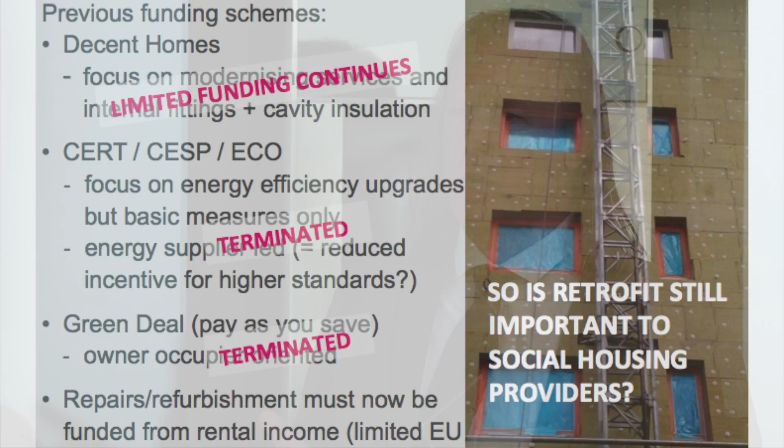Never mind. So yeah, we also talked about previously that the assumption was that in the UK we have all this funding for retrofit, but actually we don't so much anymore. True, in around about 2000 we used to get a lot of funding under a scheme called Decent Homes, but that was largely geared towards a bit of cavity fill insulation, but also mainly towards modernising kitchens and bathrooms. That's still trickling along now, but doesn't really happen to the same level.

We used to have schemes called CERT, CESP, ECO: energy reduction targets, energy saving programs, energy company obligations. So they were focused on energy efficiency, but not what I would call really deep measures. This was like, how can we do all the easy stuff, but not really worry about all the difficult bits?

And the problem for me was that this was being funded by the energy companies. So you start to wonder, actually now I do realise why they don't want to do this properly, because it's in their interest to have customers after having carried it out. And they've done their job, their lobbying, very, very well, because now that whole programme is terminated. So we have no funding really anymore.

We tried something else called the Green Deal, which was a pay-as-you-save scheme. So the retrofit is paid for by the drop in energy bills, and the difference you then use to fund a loan that paid for the retrofit in the first place.

The problem there was that the interest rates set by the government were just putting people off, and it tended to be geared more towards owner-occupiers, but they just weren't willing to invest. It's cheaper at the moment to just take out another mortgage than it was to go through that. So the Green Deal has now been cancelled. So any refurbishment that is done now by councils or housing associations just has to be funded from the guaranteed future rental income.

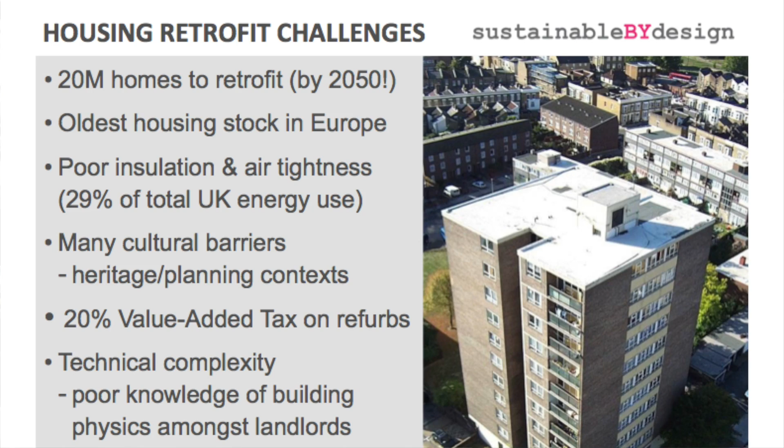And we have the same problems. We have all these heritage and planning constraints. That means a lot of buildings we're not allowed to alter the external appearance of them. We have disincentives like VAT, value-added tax, costs 20%, whereas for building new homes, there's no tax on that. So it's disincentivizing refurbishment.

And it's just really difficult doing retrofit, especially if you're trying to do it with people living in the buildings as you go. And a lot of our housing owners, they don't really understand building physics. They just want easy silver bullet solutions, but they don't really exist.

The other problem we have is leaseholders in buildings. We had a scheme whereby tenants of council housing were able to buy their property at a discounted rate. They now want to extend that to housing associations, and they're talking about $150,000 discounted rate off the market price for their flat or house. So a lot of people are going for that, but it's reducing the amount of stock.

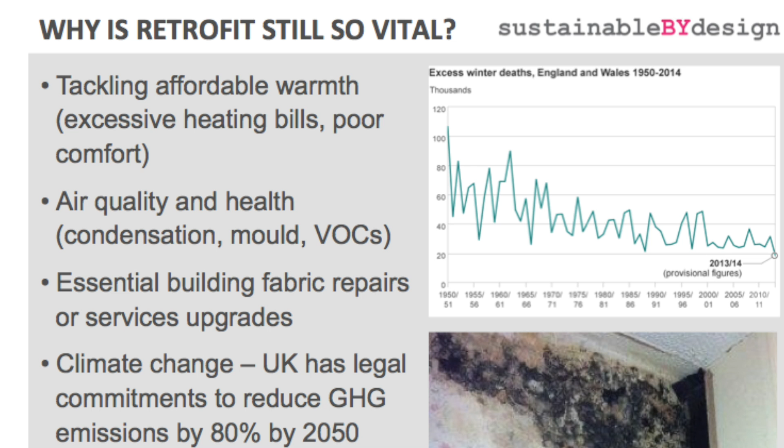It means you've got owner-occupiers in the same buildings as tenants, and they have very different wishes and hopes for retrofit. But we've got to do it. We've got a problem. We have a problem with affordable warmth. We still have around 25,000 excess winter deaths every year from cold. We have air quality problems. We have high levels of asthma.

We have all of these mold issues that have come about largely because all of these district heating systems have become obsolete and have been turned off. So we have individual heating systems in each flat, but to save money, people just don't use them. So then they get health problems. And as Bomi said, all of this is getting old. It all needs repairing. It all needs replacing.

And then finally, we have climate change. Like New York, we have a UK commitment, 80% reduction by 2050. And climate, I don't have to tell you about climate change because I asked the Pope to have a few words about that last week. So I think we've covered that one.

And she said that actually, if we're going to do retrofit, we should be doing retrofit, but it's a problem if we do it half-heartedly. We've got to do it once, and we've got to do it well. Every building retrofitted in a suboptimal way locks us into a high climate footprint future because it costs that much more to do the extra bits that we need to get to.

So that's kind of where I start with clients, is saying, look, we need to do it, but we need to do it really well. It's not okay to do your little bit. You've got to do a lot. You've got to do that $150 one, not the $50 per square foot retrofit.

You call them row houses, we call them terrace housing. Well, I don't know, there are a lot of problems. They all have open fireplaces and chimneys, there's single glazed sash windows, sliding windows, solid brick walls. Planners will never allow us to overclad on the outside of those, quite rightly too. We don't want to destroy our cultural heritage at the same time. So I'm not sure this is the right place to start.

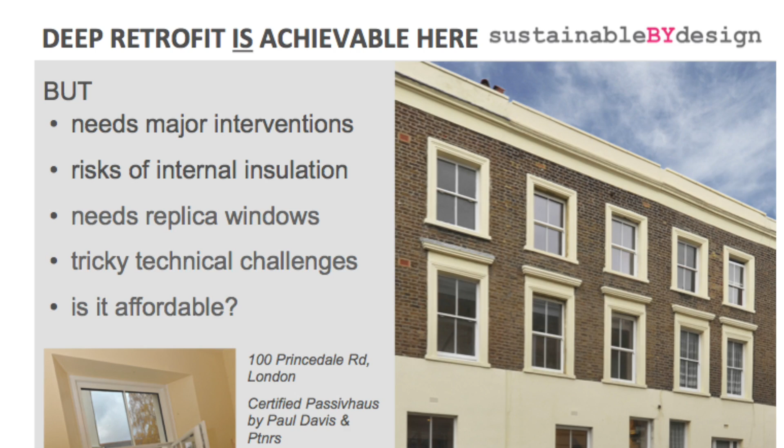I think you can do it. This has been done. One of those is a passive house, but you can't tell the difference. But is it affordable? Because you have to do special things like getting sash windows that are triple glazed, that open inwards and do all sorts of clever things. So it is possible, but it's probably right now not the best place to be spending the money.

I think we should be focusing more on this sort of stuff, which is similar to what you were seeing before. This is a Thamesmead Estate. This is where I've been urging people to start. And it's not just about retrofit. There's all these other things that you can do at the same time. You can deal with these fabric issues.

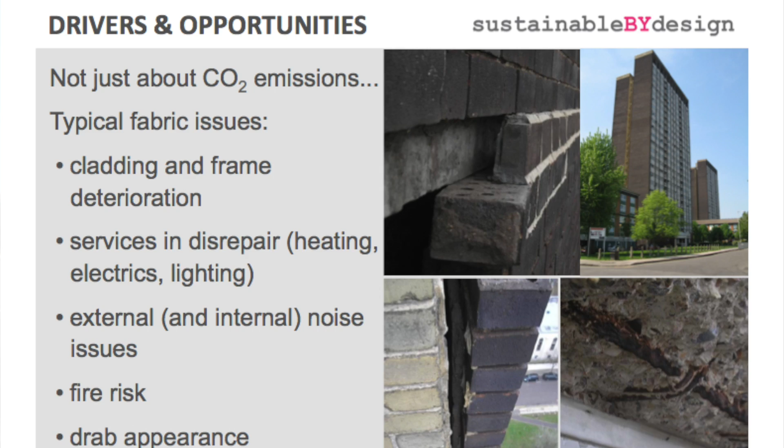Here's that brick facade peeling off the building on the 20th floor. A bit scary. So this is happening because these buildings are 50 years old. All the services need replacing. We have lots of problems with internal, external noise. They're all built next to dual carriageways, which are now really busy and very noisy. And everyone's complaining about the drab appearance of these buildings when they've had the nice, new, shiny, low-rise stuff. So we've got to do something about it.

Well, I thought this was high-rise. I can't call it high-rise anymore. It's only 24 stories or something. Can't call it high-rise anymore.

But lots of problems, lots of concrete, very poorly insulated, high bills. It's electric storage heating because the building can't take gas because of explosion reasons, progressive collapse reasons. It's owned by the city council, and they've got real problems and they're under a lot of pressure to do something about it. So their idea was, let's introduce a district-wide heating scheme that can do all of this block and all of this area. Well, we better do a bit of insulation if we're going to invest in all of that. And that's how they went forward.

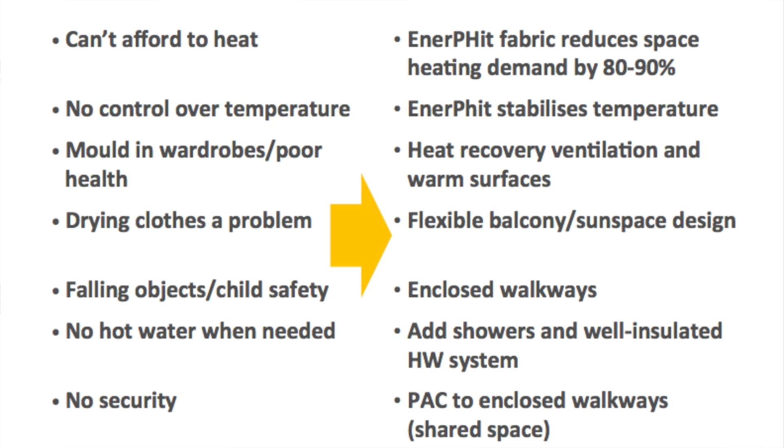So their problem was they can't afford to heat the space. Well, EnerPHit will reduce that demand by 80 to 90%. They can't control the temperature. Well, the cladding can stabilise the temperature. They have all these mould problems. Well, we put in heat recovery ventilation. And one by one, we dealt with all of the issues that they had and turned it around and started to get real support.

The overcladding strategies we had to deal with, they look simple. That looks like a big solid facade. We'll just pin insulation to the outside. Unfortunately, that's a bit of a cheat, because the outside face of that is a sandwich panel, unreinforced concrete, only 2 inches thick. And if we started pinning insulation into that as we would normally, it would just shatter. So what looked straightforward became more complicated.

These big blue things, they look very strong, but they were sized just to carry their own weight in these balconies, and even adding insulation to them would have been too much. They're also not actually joined to the inside building. They just kind of sit there on their own. So our new structure had to brace either side of that and go right through into the party wall structures to tie it all together.

But now the new steel structure holds everything together. And that's how we solved the outside for them. The cheapest way of doing overcladding in the UK is to put an insulation on the outside, pinned onto the wall, and then have a render finish over the outside. Now for me, that would have just recreated the same fairly bland facade.

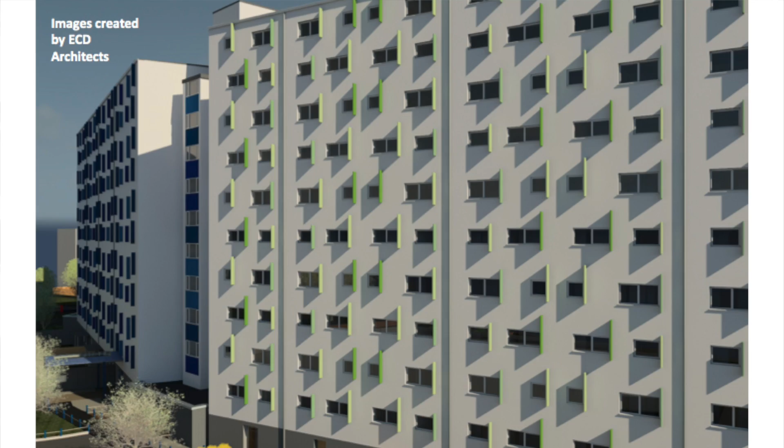So we talked to them about, one of these is quite west-facing. We talked about the need for shading. You can always approach these buildings from different angles. So actually we talked about how if we use these fins to help with shading, we keep them on the south side anyway, but it just means that as you start to approach this building, you see it obliquely, you see different depths of colour. As the sun moves around, you get different levels of shading. So you get quite an animated facade from quite a boring window grid.

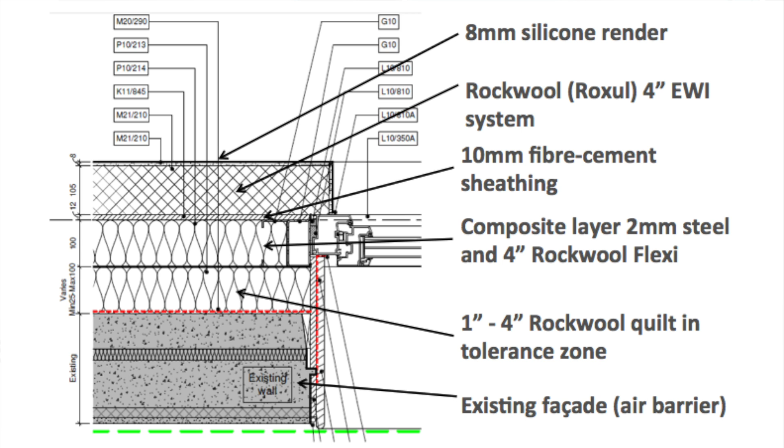And there's a kind of diagram of how we had to put steel on the outside, but we're putting a lot of insulation on the outside of here, a foot of insulation clad to the outside of this building, triple glazed, plastic framed windows. And that was our vision for the outside of that building. A bit more glazed here.

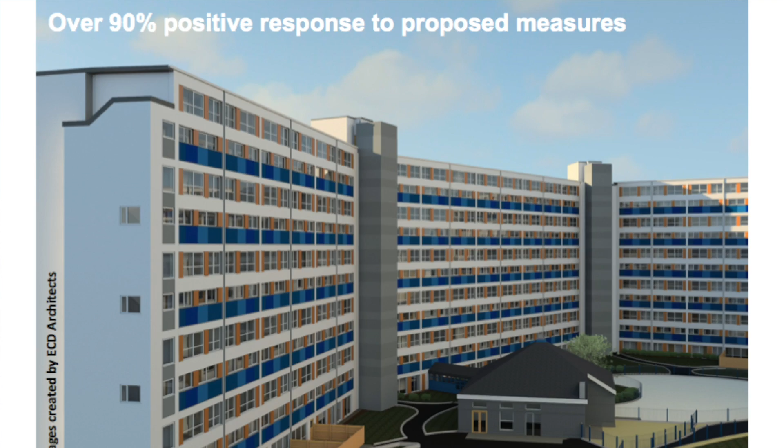We've got a lot of walkways, and for the balconies, we sold the idea of, well, we have an insulated enclosed balcony, but you can have windows that would open up, and you still have a secondary insulated envelope behind the balcony so that they can use that for drying. They can use it as a balcony, but in winter you can close that off and it's all part of the thermal envelope. And they all picked the blue colour.

That's the colours of the local Portsmouth City football team, soccer team, sorry. So yeah, I tried to choose the rival colours, but they wouldn't go for it.

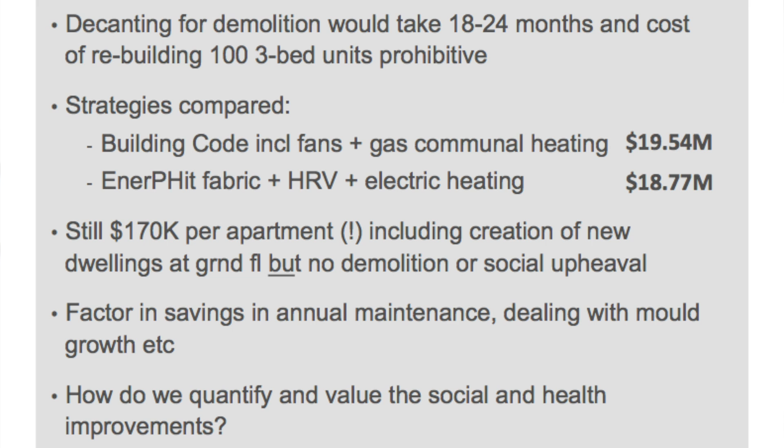So anyway, we had to make this argument. Is this all affordable? Well, the answer is it actually came out cheaper than their scheme. Not by much, but enough. But the benefit was that the tenants' bills would go down by that 80%. It's win-win. It doesn't cost more for the local authority, but the tenants gain massively from this. View of that kind of balcony area.

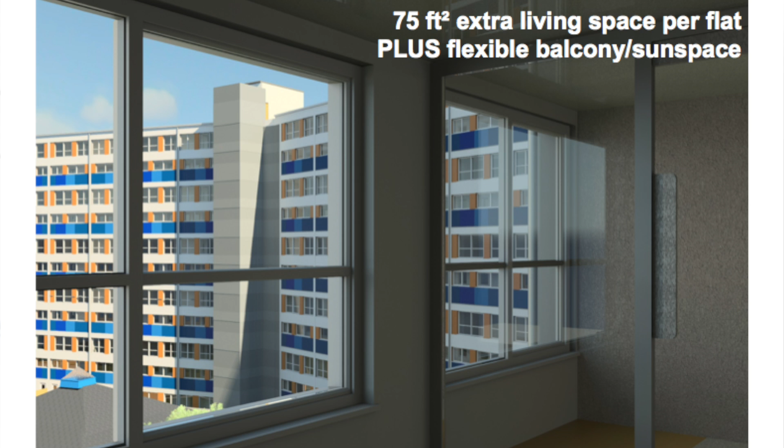So they had to then sell it to their board, to their government, and they took the view that the do nothing option didn't exist, it would become uninhabitable very soon. They were able to get very good rates on loans. They did the calculations. They found that the extra over to go to EnerPHit paid for itself within 15 years. Plus then they sold all these other benefits about the health, the affordability.

If you can afford to heat your house cheaply, then you're more likely to pay the rent. So they can save on rent arrears. Their operatives don't have to go in and scrub mould off twice a year. So there are lots of other benefits that we start to build into the picture.

So where are we now? I actually left that architects. I designed that. I thought that was the end of my involvement in it. I moved to a new practice. They appointed a contractor. The contractor said, we need an architect to see us through the delivery phase. So everyone said, oh, you should go and talk to Mark. So I've ended up working back on the same project again, which is good.

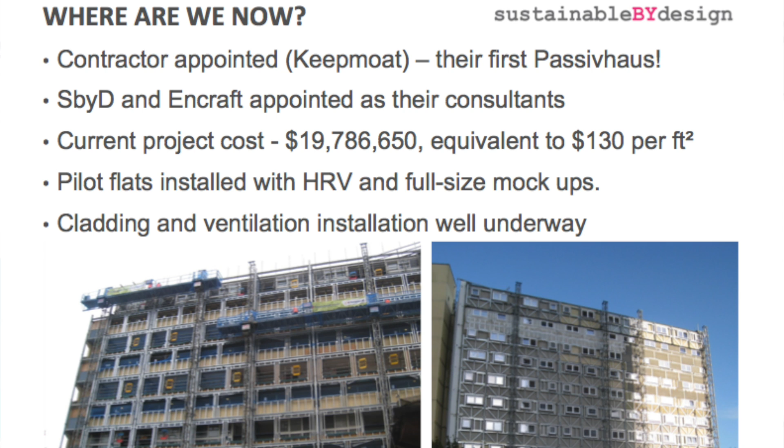The price has gone up a little bit as we've found more asbestos and we've got more involved in it, but it's around about $130 per square foot currently. But a lot of that's new. We're getting new flats. All of the ground floor is being converted into new flats, and every flat gets 75 square feet of extra space.

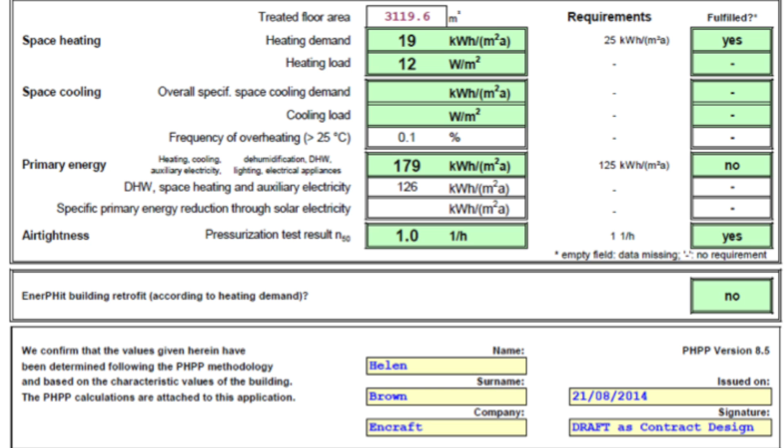So here we are at the moment. For anyone who understands PHPP, that's 19 kilowatt hours per metre squared. That's pretty low in terms of heat. Use British thermal units. No one in Britain uses British thermal units.

The other interesting one, overheating, 0.1%. So this has been designed for cross ventilation so that it doesn't overheat, so we don't need air conditioning. I was interested to hear about your peaks being in the summer. Air tightness. One of our problems is our energy use is still quite high because of that use of electricity. We have dirty electricity, so that's something we have to work on. But here we are now.

There's the exoskeleton going on. This insulation goes behind that, in between that. And on the outside, we've got a fibre cement board. So that's ready for its final layer of 4 or 5 inches of more insulation. Rockwool, you call it over here? Rockwool. So that's going on the outside. These are triple glazed Austrian windows, insulated frames, triple gasket, airtight, very high performance windows.

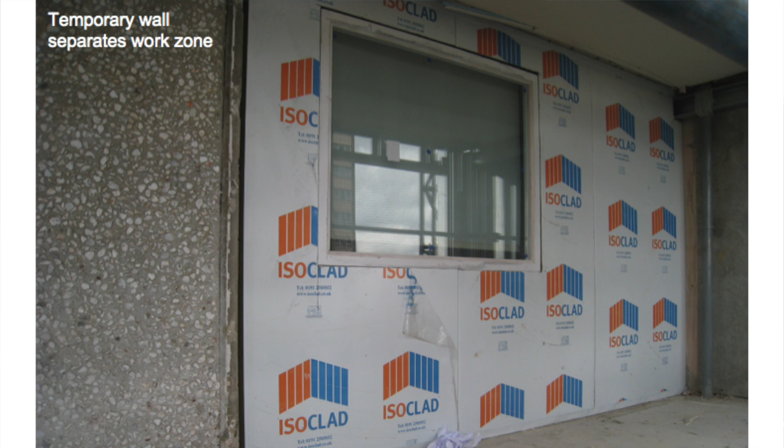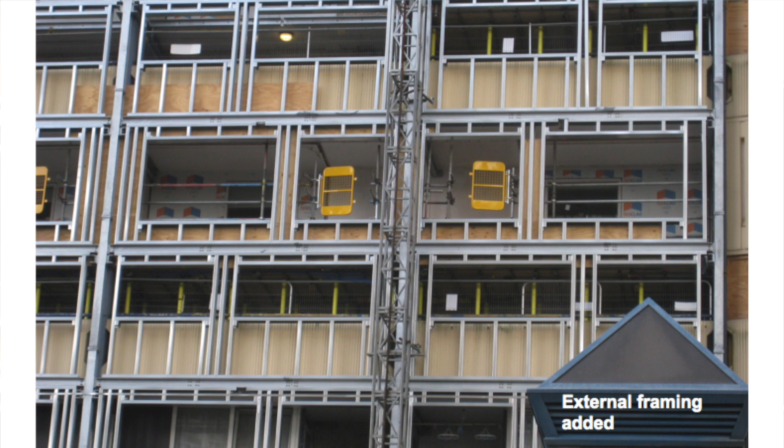Everyone's living in this building whilst we're doing it, by the way. So we had to create these enclosures. We reduced the size of their living room temporarily, do a load of works on the outside, crunching off all of these balconies, all done with the residents living in situ. We extend that living room, enclose in those open walkways, and there's the new facade window being created. That's kind of where we are now.

We have to fit in heat recovery ventilation, so we do that all in the ceilings, and there's a lot of semi-rigid ducting all going in, all at ceiling level. It's tight, but it just about fits. And that's the vision there, these are all produced by my former colleagues at ECD, of how that should be by the end of next summer.

I've got 2 minutes to talk about the other project. I'll have to skip loads of it, but I want to get to the pictures at the end. This is the building we're talking about, a bit lower, 5 stories, 4 stories sitting on top of a car park. Pretty hostile urban environment, not exactly a nice street. This is one of the main streets through this part of London. This is the other side, a bit nicer, facing the south. Everyone has an individual balcony, 2 stories of duplexes. Again, that car park. How can we make use of that space?

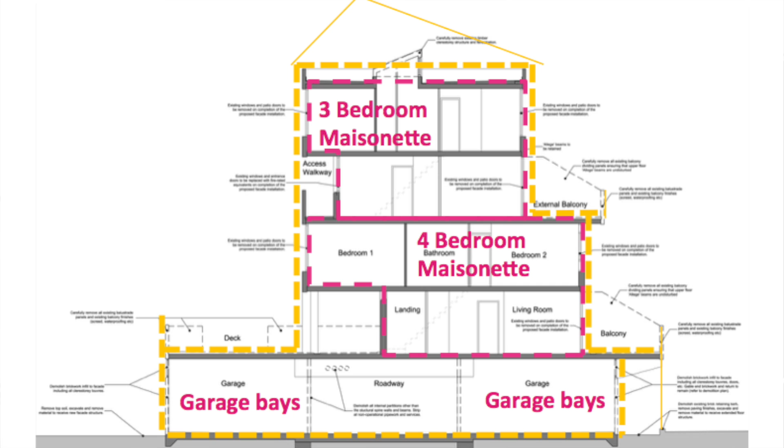So we took a different approach. We're working with a German contractor to use prefabricated timber cladding on the outside. So we build the whole panel from inside to outside to the cladding. We're using German contractors because they'd done it before and it was part of a European-funded pilot scheme. So built in Bavaria, brought to site and lowered into place from the outside of the building. Click through, that's more detail. That was my back of a cigarette packet sketch.